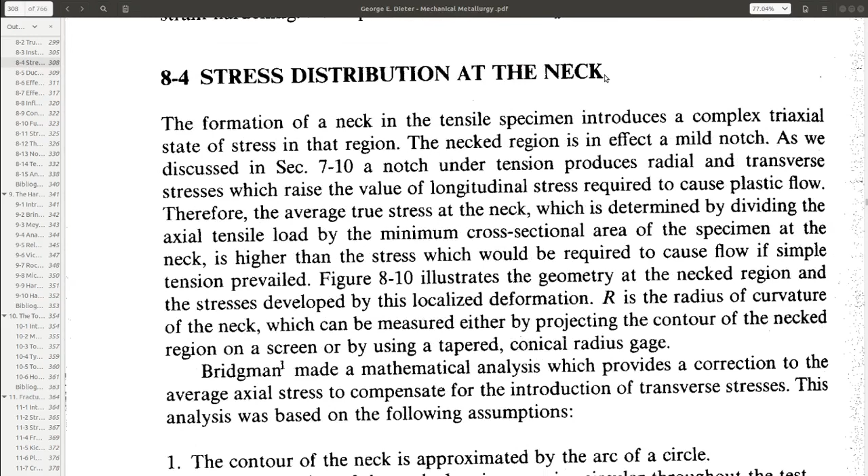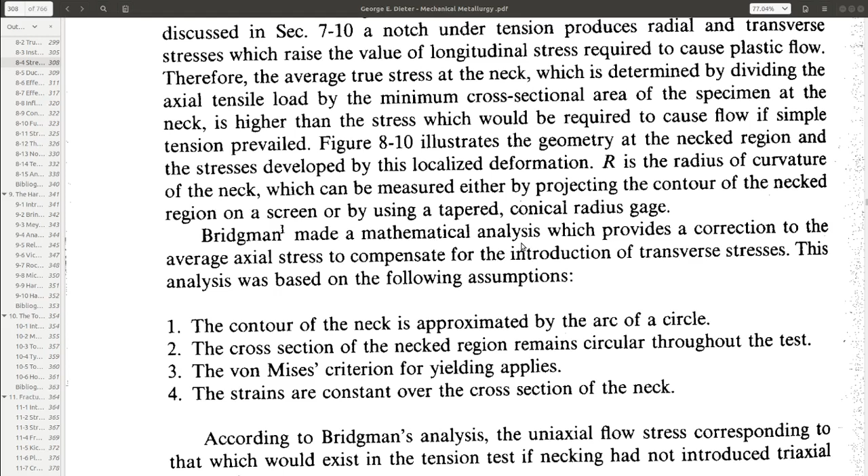Therefore, in order to rectify our assumption and make the correction on the true stress calculation, we have to consider what the stress distribution is in this region of the material. That's what we're going to discuss under the topic stress distribution of the neck. And that has been attempted by a person called Bridgman. He has done a mathematical analysis, and in his mathematical analysis he made some assumptions. These are the assumptions he made for that stress analysis.

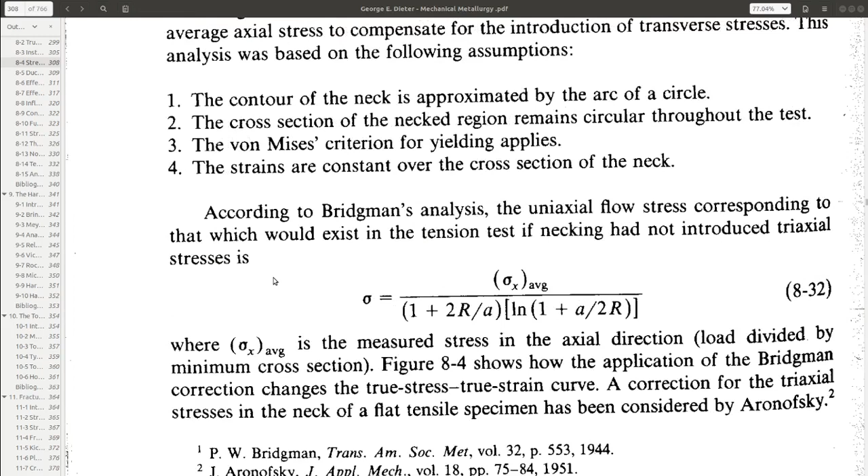The first assumption is the contour of the neck is approximated by the arc of a circle, which means this curve is an arc of a circle. The second assumption is the cross section of the neck region remains circular throughout the test. So anywhere we section it perpendicular to this axis, what we observe is the cross section region is a circular region.

That's a reasonable assumption, because for a cylindrical specimen there is no reason to become axially unsymmetric, right? And then he assumed the failure criterion, which is the von Mises criterion. If yielding is going to happen, then it will happen when the stress, because right now it's no more a uniaxial stress behavior, it's going to have a multi-axial stress behavior. For that we require a multi-axial failure criterion, and for that he used the von Mises criterion.

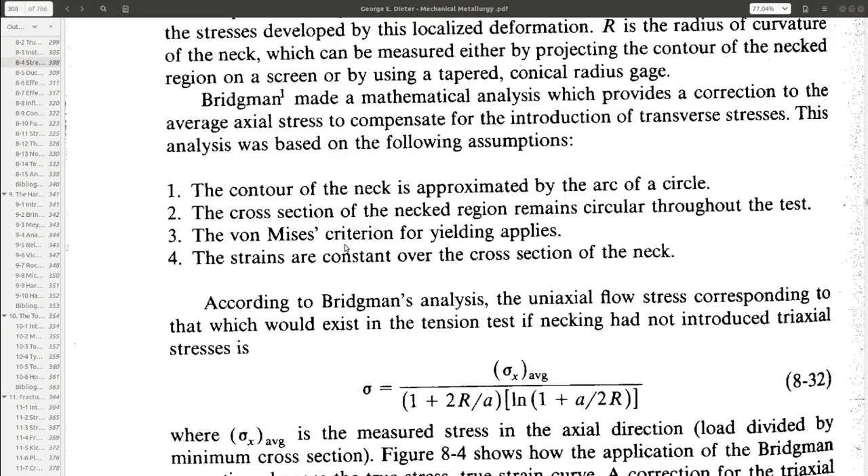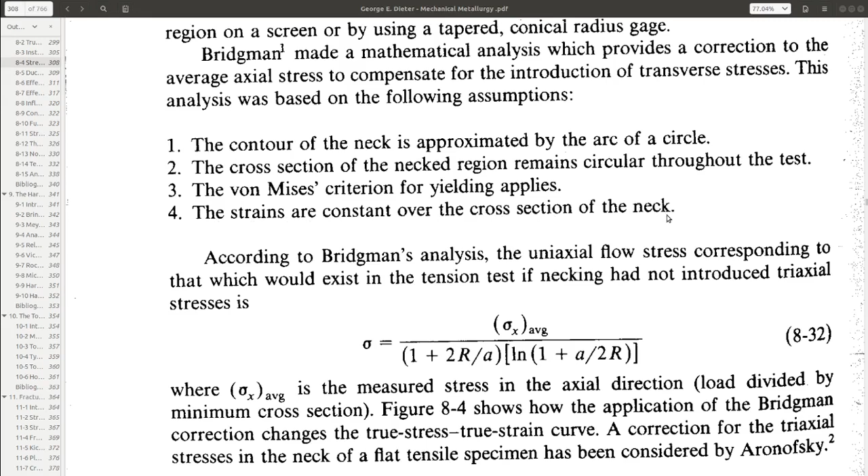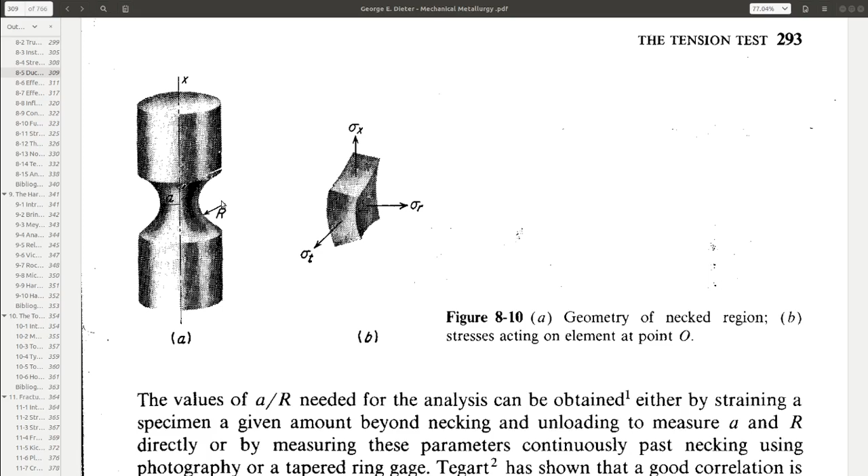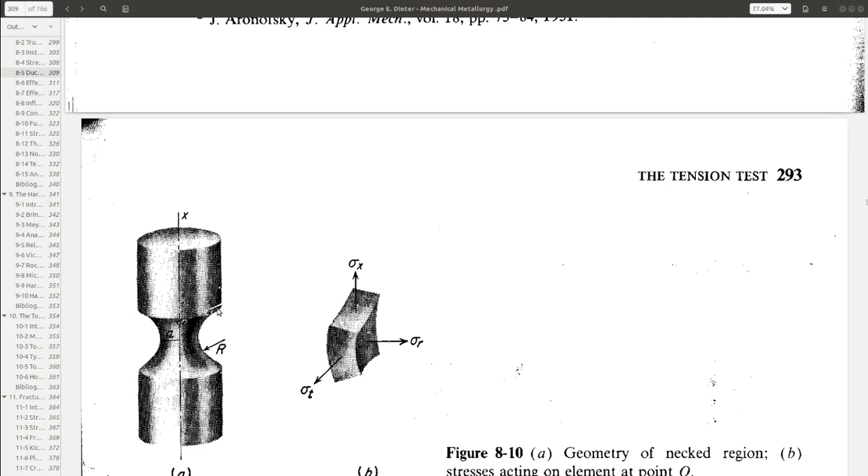And finally, the assumption he made is the strains are constant over the cross section of the neck, which means for any cross section or any infinitesimal piece we take, the strain is uniform. With all those assumptions he has come up with a corrected sigma, which is equal to the average sigma divided by this term, where a is the radius of this cross section, and R is the radius of this circular arc.

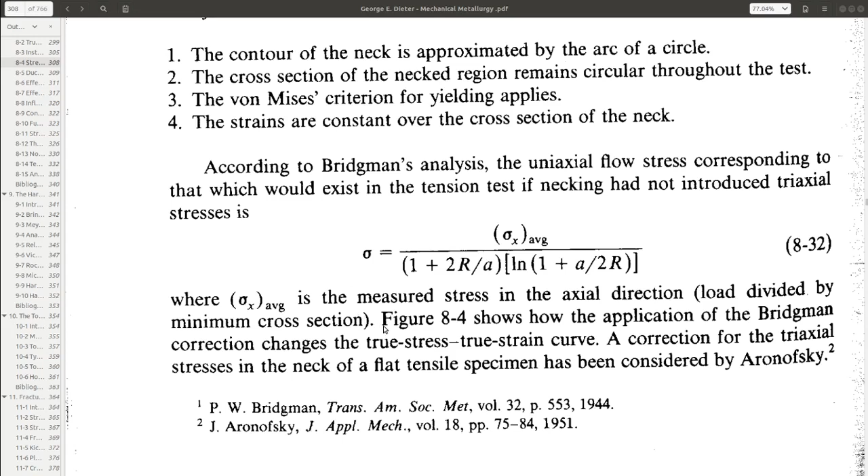So with these assumptions he made this correction to the true stress true strain curve, and this is valid after the material starts necking. The corrected stress strain curve is given in figure 8.4. So this is the true stress curve, and this is with the correction proposed by Bridgman.

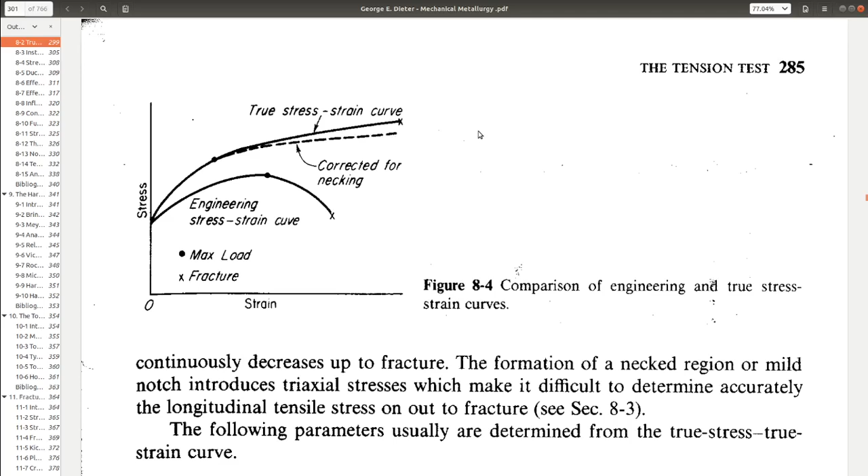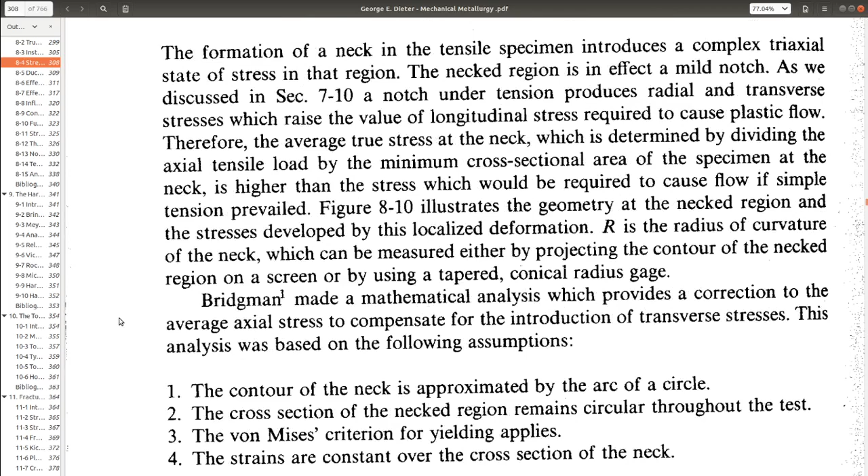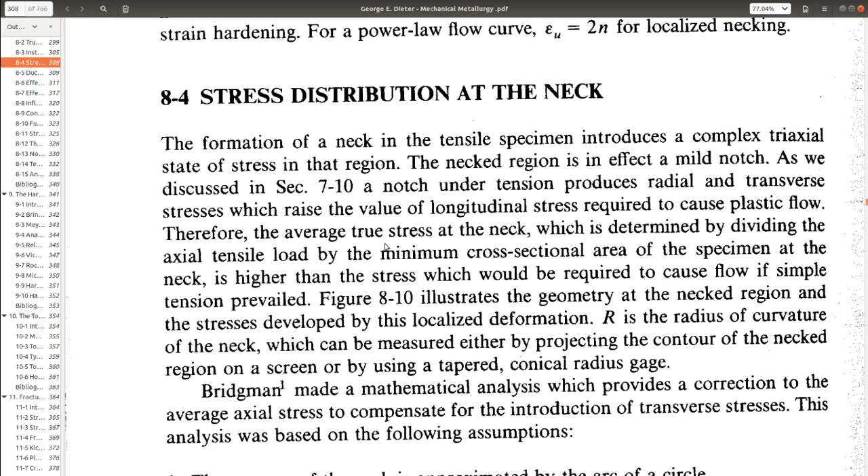Right. So that's a deviation from the true stress true strain curve, and that has been observed when we consider the stress distribution at the neck. Okay, thank you.